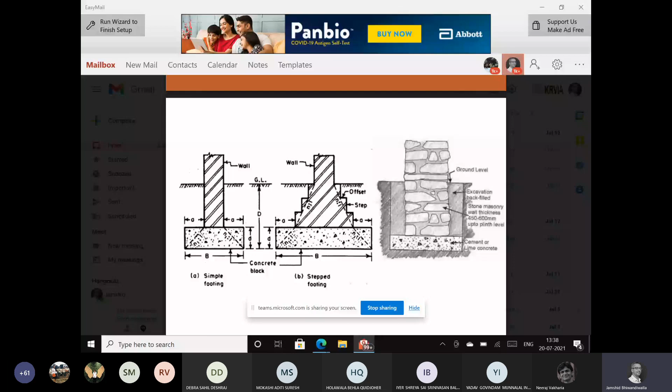Now, today's request is also part of the work that we are to do. If you look at the fifth semester syllabus, it largely talks about shallow basements. And our project too would have in some sense basements to help the building work well. So it makes sense that we discuss all aspects of foundation today, how one goes about it. And we'll also do a recap.

Last time, I think Shravan had very rightly pointed out that a good mix between PowerPoints and sketching classes will help. We had made this kind of presentation last semester for all kinds of foundation systems, and let's hope that can help today. So first of all, we'll look at the very basics of load bearing foundation.

Last year, and even this time, I have a couple of students in my group who are talking about composite construction. Composite construction means that I could have certain columns, a trabeated system, that is column beam structure, and I can also have a good play of load bearing structural system, meaning load bearing walls, either brick or stone walls, in line with the trabeated system. Some of them can be freestanding walls, just to create some kind of impressions.

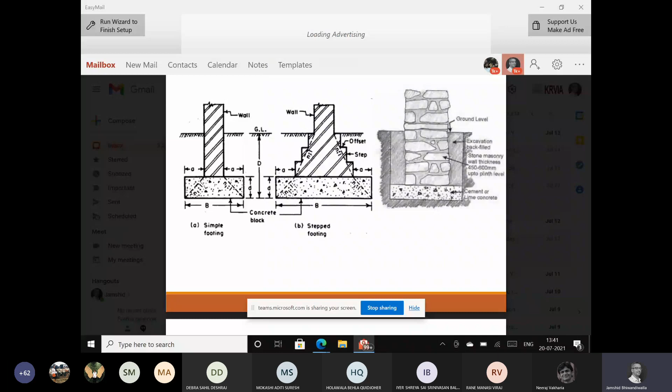I'm sure in the first year this must have been covered, that the width of the load bearing foundation is usually twice the width of the wall above, as well as 150 on either side, that comprises the concrete pad. So usually the lower breadth of a stepped footing is twice the thickness of the wall plus 300.

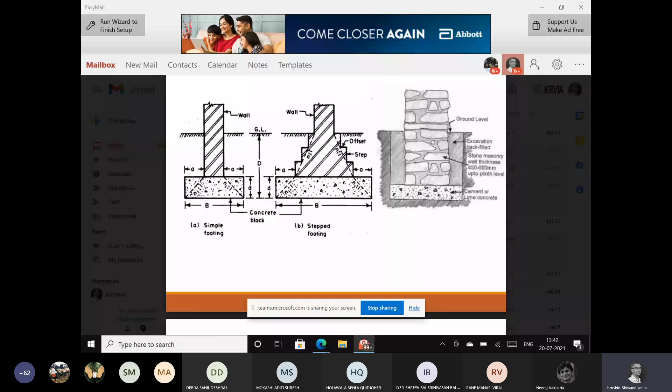So brick walls have the opportunity to step down. But this diagram that you see is not right. Usually the stepping is not so close by, because the foundation goes really low below. It is not as close as the way it is shown here. So this isn't a right diagram in that sense.

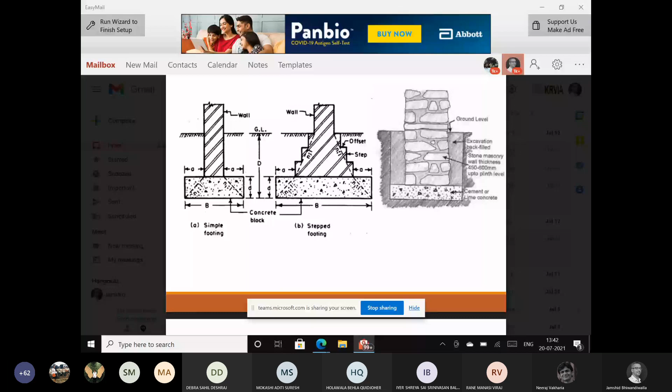In some sense, this is the right diagram where the offsets are large. The offsets are not close by. Every layer is not an offset. The offsets are in some sense large as they go below the ground. And they go as much as 2 meters, 2.5 meters below the ground.

When we do material specification, we will understand that excavating below the ground for normal foundations vis-a-vis excavating below the ground for basements or for deep foundations matters a lot. The more you go below the ground, the more are the problems, the more is the expense, the more is the material use, and all those aspects. That's why most of the time we tend to go a little below the ground.

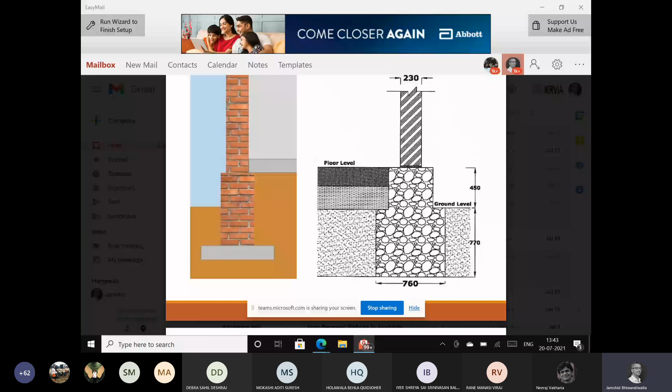There are numerous projects where you actually see that the building has got part below the ground. It's not a full basement. It's a part basement below the ground and part above the ground. It helps a lot in material consumption. It helps a lot in the kind of digging that goes in, the efforts that go. A lot of effort is conserved in doing all of that.

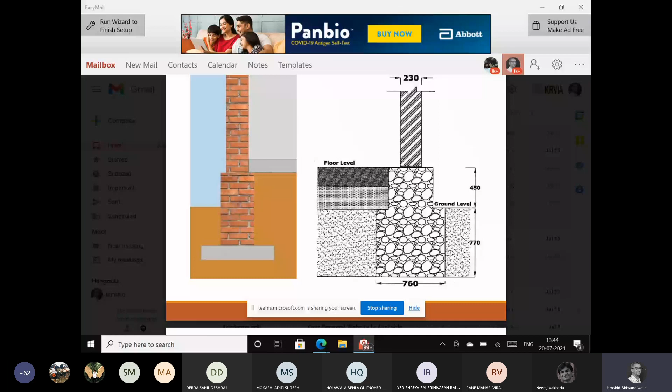So here to the right is a diagram which in some sense is right and in some sense is not right. That's why when we rely on internet based images, it's not necessary that they are right. So to the left, you are seeing a brick foundation whereby the brickwork becomes double and the pad is 300 more than the brickwork. So 2T plus 300.

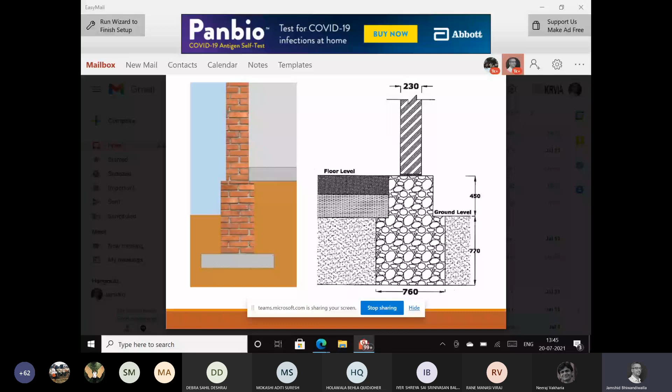Whereas what you see to the right shows that the stone foundation wall does not stagger. Usually it is very difficult to make this stagger when you're dealing with stone. The other truth is that most of the time, at least in Maharashtra, we avoid using any brick below the ground. So if you make a load bearing bungalow, a load bearing institute, or even a compound wall, you may have brickwork above the ground, but below the ground, usually you have basalt stone, which is so easily available and so rough and easy to work with.

Easy to work with does not mean that it is easy to cut. What I'm saying is it is easily available. And when I do not have to do very coursed rubble masonry or things that you have learned in the first year, it becomes very easy to just dig a thick strip of the width of 2T plus 300 and dump the rubble below. So what you see to the right in this diagram is what is right.

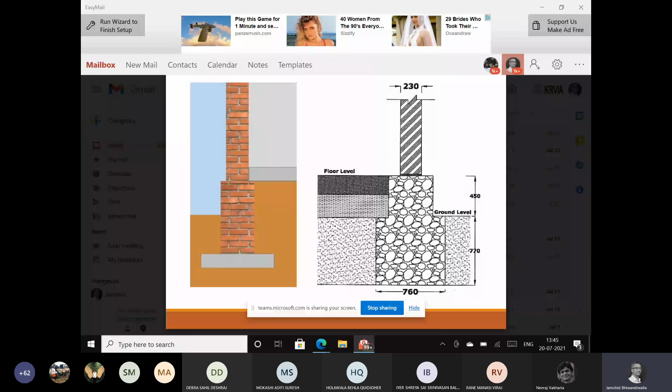Usually the width of the stone wall below the ground remains constant, whereas the brick wall is usually stepped. So brick walls below the foundation are usually stepped. Stone walls below the foundation are usually constant. And you don't need to actually go below the ground and start building stone walls.

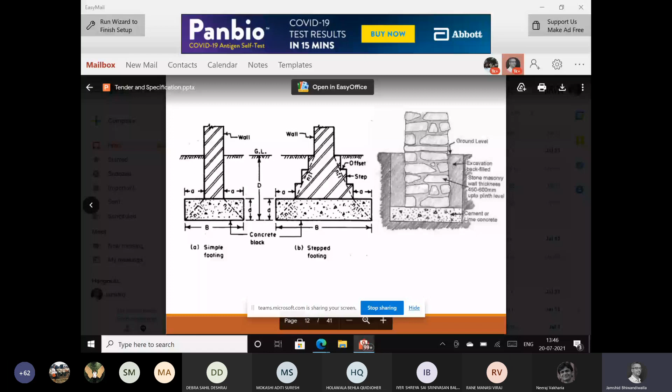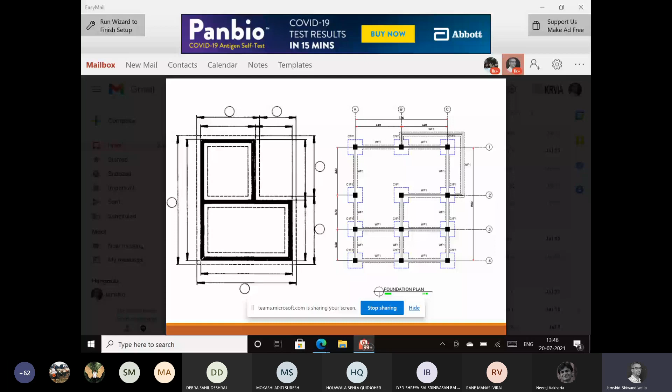So this is the difference you will see between a load bearing foundation vis-a-vis a trabeated foundation, and that's the big saving. Why do people not go about building large load bearing constructions? Because the material that is going to go below the ground in load bearing is immense, because everything that is above the ground is also going to go below the ground.

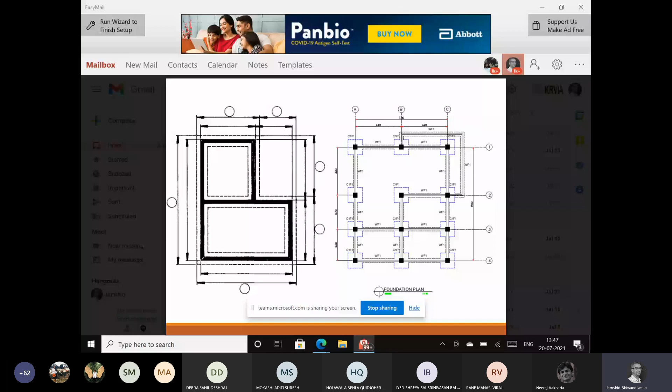Everything that goes below the ground is also to go, everything that is above the ground is also to go below the ground. So in that sense, the kind of material that is going to go in a load bearing foundation is much, much larger. And that's why in today's day and time, when you work with material economics, it makes sense to go in for systems whereby there can be a larger saving of material.

Similarly, in a trabeated structure like the one you see to the right, it is only those columns that are going below and are getting connected by plinth beams, and what the load is getting transferred through is called an isolated footing. So load bearing foundations are called strip foundations because they are laid in entire strips, whereas trabeated or framed structures have what are called isolated footings.

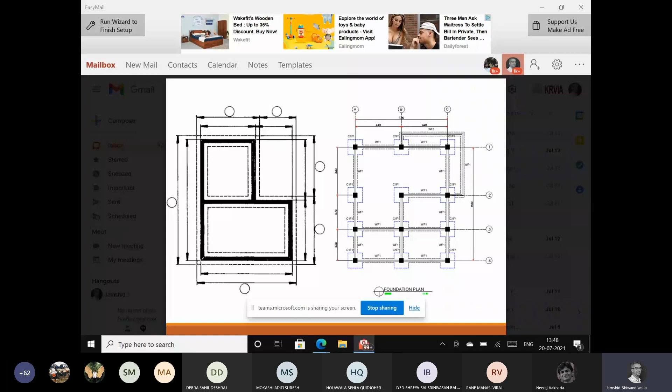So what you're seeing to the left is the hatch of the entire wall. When you make foundation drawings for your working drawings, this is the major difference in representation that you're going to see. If you have load bearing walls, your entire walls will be shown hatched. They'll go below the ground. I'm sure in your last year's IDS, some of you must have dealt with either load bearing or frame structures, and accordingly made a foundation drawing.

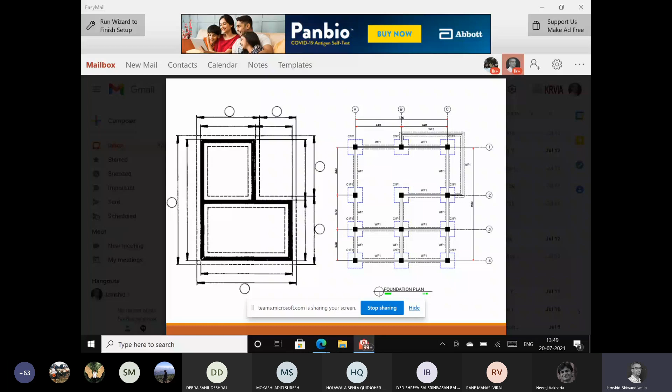Similarly, in framed construction, all you will see is the hatch of the column, the footing around it, and you will see that columns are further connected using plinth beams. Now, trabeated or framed construction has that big advantage that the foundations are further connected using plinth beams, something that is happening in load bearing construction. In load bearing construction or strip foundation, it is all interconnected below the ground too.

In frame structures also, plinth beams are connecting all the footings below the ground, thereby not allowing the footings to separate off in case there are floods or earthquakes. So below the ground, there is a tie between all the foundations, and that is very important. And that is what plinth beams end up doing.

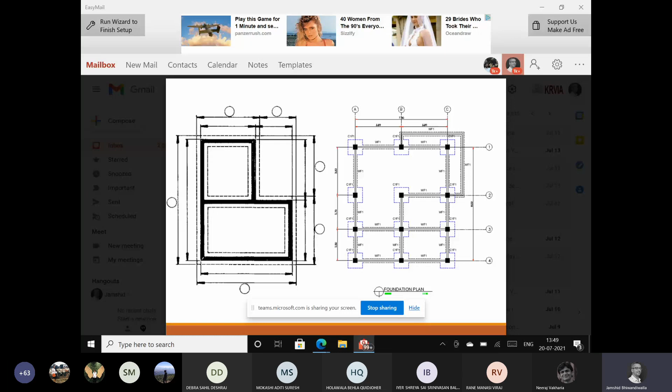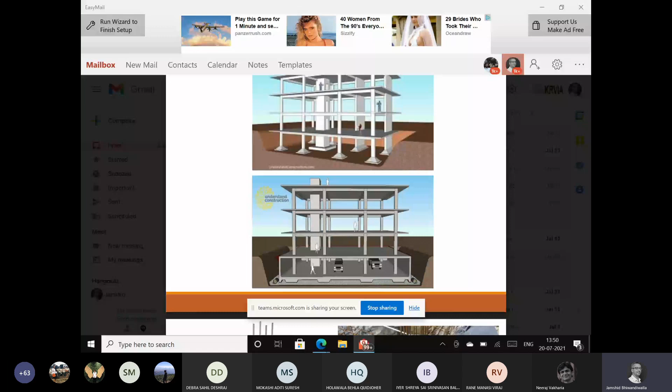Now, what's the difference between an isolated footing framed structure and a frame structure that goes down and becomes what is called a basement? What you can see here is that columns go down and give you isolated footings, and that is all you need to dig around. You don't need to dig the entire length of the wall. You just need to dig a little more than the width of the column that goes down to become a footing.

Whereas when I'm dealing with a basement, I actually need to dig the entire width of the building, or as much as I want as the basement. And it is literally a kind of container or box that is made and tucked into the ground, whereby the bottom is all well connected. That means all your columns are well connected at the bottom by an element that is now not called a footing but a raft. So we have a raft.

If you imagine, a raft is something that floats over water. We create rafts to float in water. Similarly, this raft is also allowing your building to float, only it is floating above soil. In construction systems, soil is considered as good as a fluid, and your building is as good as a float over the ground. So the raft is allowing all the columns to get connected by creating a plane below the ground, as you see here.

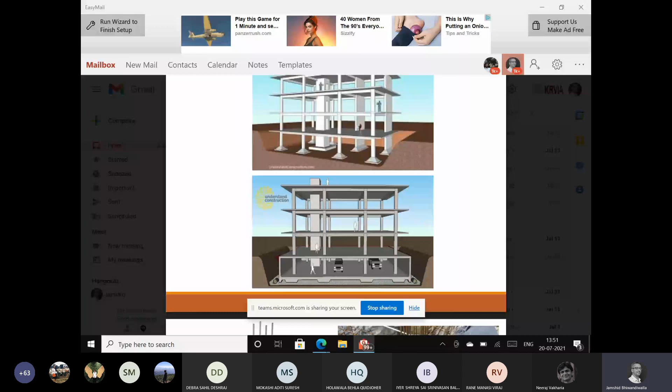Where the columns come, in some areas the cross section of the raft is a little larger, if you see visually. In some areas the raft is thin. Most of the time the raft is of the same thickness. There can be staggers and undulations in the raft in order to conserve material, but it could also be constantly laid all throughout.

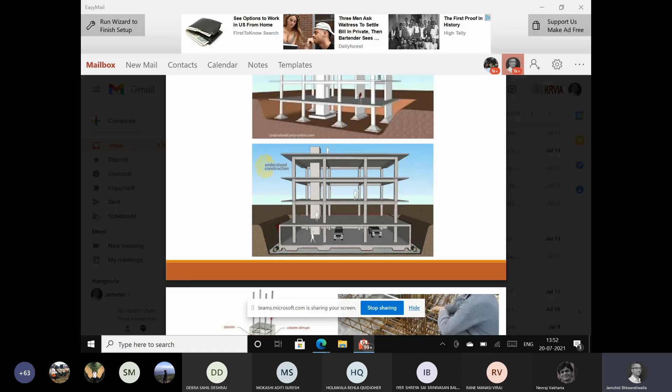So the raft is one element, and the vertical walls that go to the sides of the raft are called retaining walls. Those are usually done in RCC in order to finish off the entire box that gets tucked below the ground. So now you have a system that comprises an entire slab laid below the ground called a raft, vertical RCC walls called retaining walls, and a slab on the top to finish off and create a new ground level.

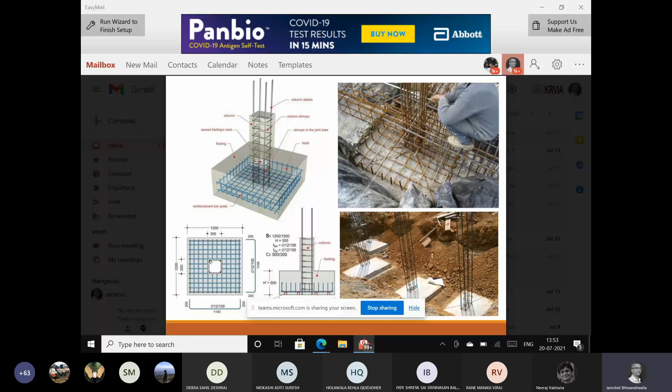So now that's the difference, and that's how your building is going to be looking. So now let us look at some of the differences between very simple foundation details as compared to rafts and things like that.

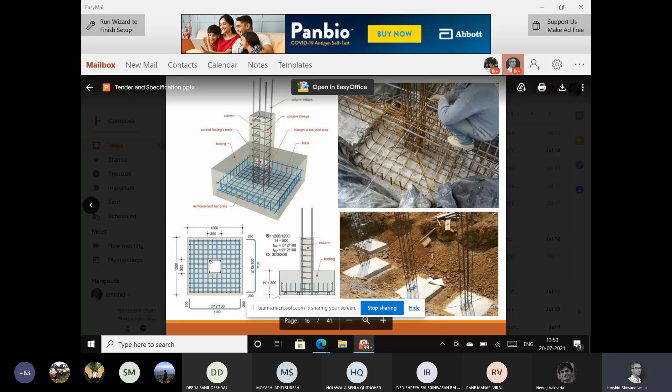So an isolated footing has reinforcement only at the bottom. RCC footing has reinforcement laid only at the bottom with a bent bar on top. So it's an entire mesh that is laid only at the bottom of the slab. Do not forget, this mesh is only there to spread the load, equidistantly spread the load over the soil. You can see all the three images.

You can see what is done in 3D and drawn in section corresponds to how the footing bars are laid in reality, and how the column bars get entangled. The column bars that come all the way from the top of the building, how they come and get entangled into this mesh that is laid below. It just bends and lays below.

So if you look at the 3D, the drawing 3D is not entirely correct, because it does not show how the columns come and get entangled into the mesh below. Whereas the photograph to the top right actually shows how the column steel comes down and bends to get entangled with the mesh of the footing.

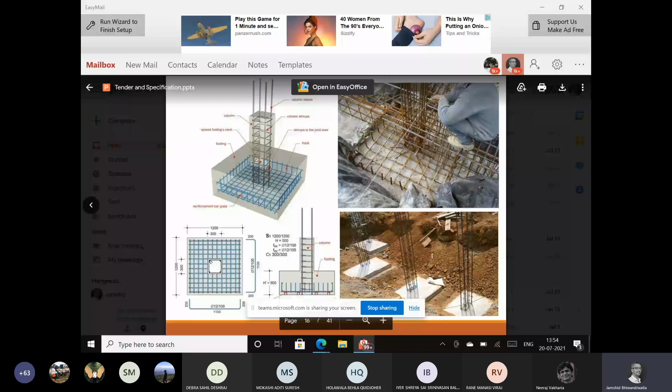Should you have any doubts, please feel free to interrupt. There is nothing wrong in interrupting if something is not clear, rather than asking doubts at the end. If the doubt is small and can help, I may miss out on something, so if ever there is a doubt, you can always inquire in between.

Now the footing is cast. There are various types of footings that are cast. A footing can be cast as an entire rectangle, but it is found that trapezoidal footings are more material effective, cost effective. And so the image to the right bottom shows trapezoidal footings with limited thickness. The thickness along the edges is less. The thickness along the footing is large, and it usually slopes down.

So that's the difference. In the diagram to the left, the concrete is shown to be a rectangular cuboid with no slopes. But you can save on the material of the footing by sloping it into a trapezoidal footing. And these are what are called plinth beams. They help connect the footing at various levels.

Plinth beams are also further of two types. Plinth beams that are on the periphery, which we usually call external, are usually lower, thereby helping you to do brickwork on top of them. Internal plinth beams are usually higher. So internal plinth beams are higher and external plinth beams are a little lower in order to help pass services, do brickwork and stuff like that.

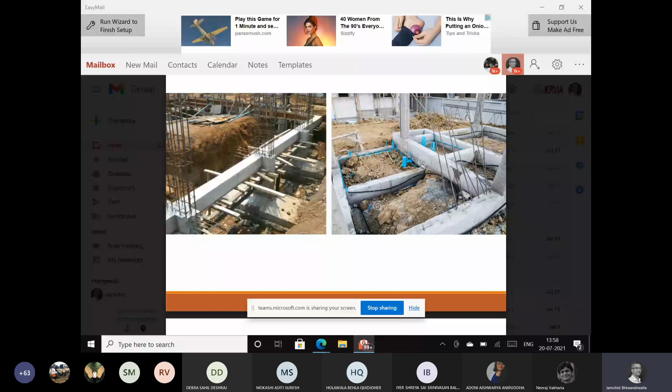As and when your case works out, you'll further know how it works. We should be in a position to explain, or in a separate sketch I'll explain, how an internal plinth beam is different from that of an external plinth beam.

Now, footings, isolated footings are not only related to RCC, they are most common for RCC, but there is also an isolated footing in steel, which is well known as grillage foundation. So grillage foundations are nothing but isolated footings made entirely in mild steel. And what does that mean?

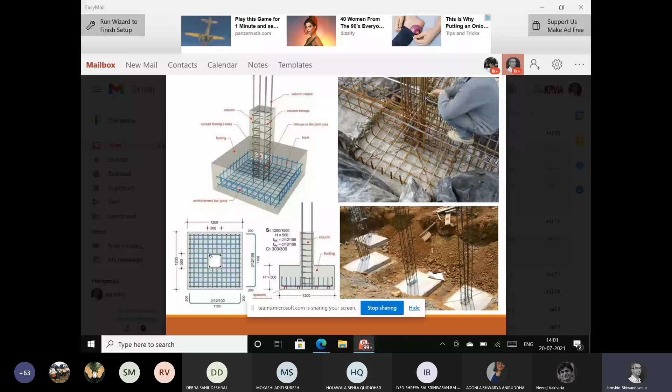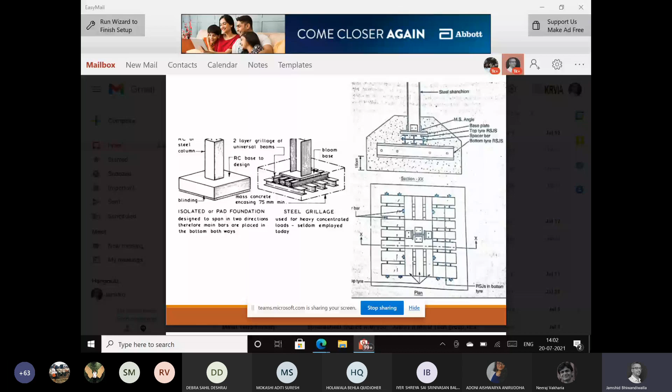So where is grillage foundation used? Grillage foundations are largely used for temporary structures, like a circus tent. In a circus tent, the mast at the center is usually very high. It comprises a central column. Now, if that needs a foundation below, it will have this kind of foundation, a foundation that can be dismantled.

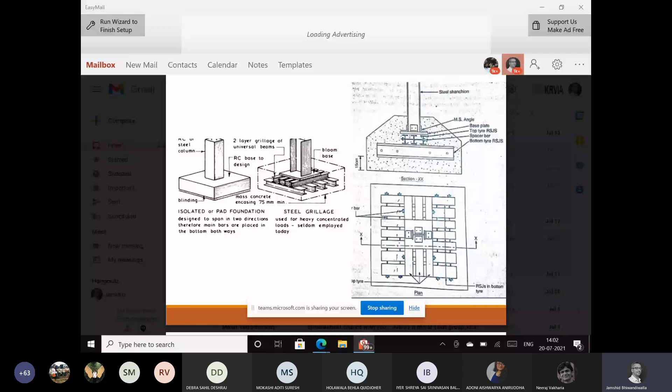So if you're doing a circus tent in a public ground, naturally you don't expect to make foundations and leave them and go. So you dig a pit, put in this kind of grillage foundation, put your supports, be there for a month, a few weeks, whatever it is. And when you wind up, you bring down the tent. You can open up, nut bolt even your foundation, put it in your truck and take it with you to your next site.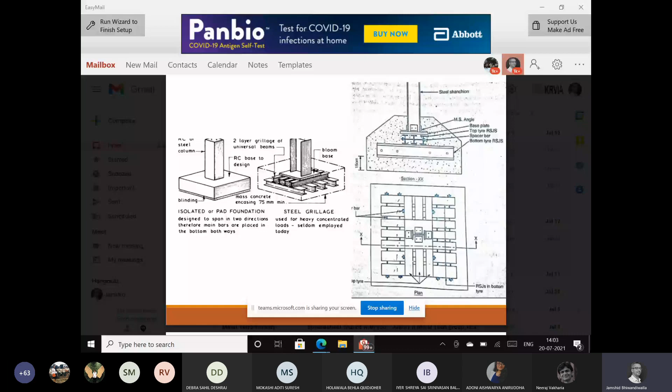So for transitional or temporary foundations, grillage foundations work the best. Otherwise, they prove to be pretty expensive by way of the amount of material used. Plus, it is not advisable to use steel structures below the ground, because it tends to deteriorate.

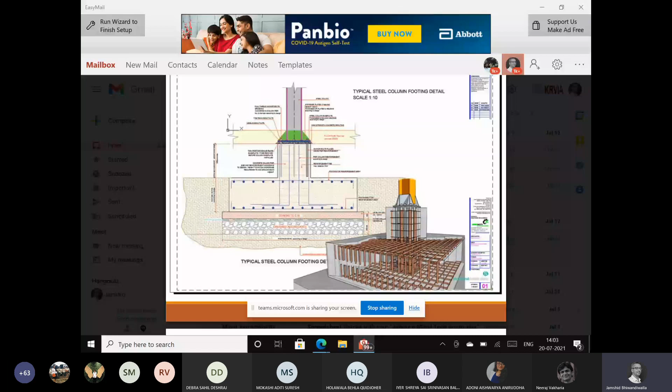So you could also have a composite system. When someone asks, when we have steel columns, what kind of foundation do we have for a steel column structure? You could have a composite system for a steel structure. Your columns could be in steel, and your footing below could actually be in concrete. So you could have a stub column that could come in concrete.

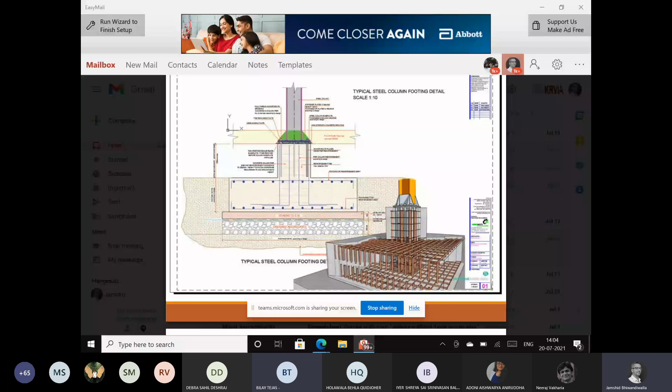Someone have a doubt? Yeah. Yes. In the last slide in the grillage foundation, in the section it says there is a spacer bar. So then, is there a distance between the two flanges of the I-beams there? And if it is there, then what is the minimum distance?

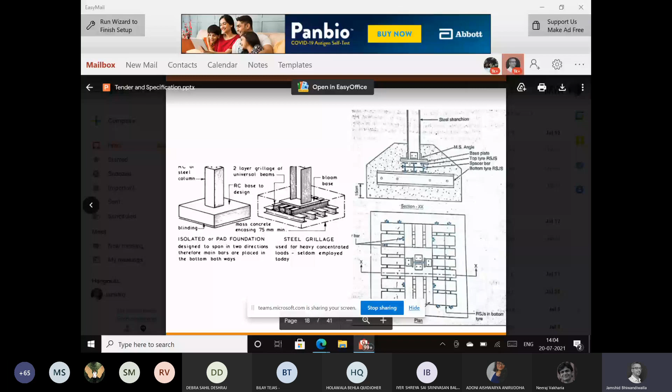What happens is that the closer we keep the I-sections, the more the number of I-sections that are going to go in. So it's not necessary that you place the I-sections so close by that there is no space in them. The I-sections can easily afford to be spaced out, as you see in both the plan below and the 3D. So the I-sections are spaced out depending upon the width of the footing and depending upon the length of the footing.

And how many I-sections should you be having? What should be the depth of the I-sections? Those will be given by the structural engineer, right? Depending upon the load that comes on the column. Now, when I arrange these columns, I do not want them to be arranged in a particular way. I want them to be arranged in a

Jimmy, we can't hear you. Are you speaking? Yeah, I guess his internet is fluctuating. Let me just check. Jimmy, you are on mute, I guess. Yeah, can you hear me? Yeah, now. I think I got disconnected. Can you hear me? Can you see the screen also?

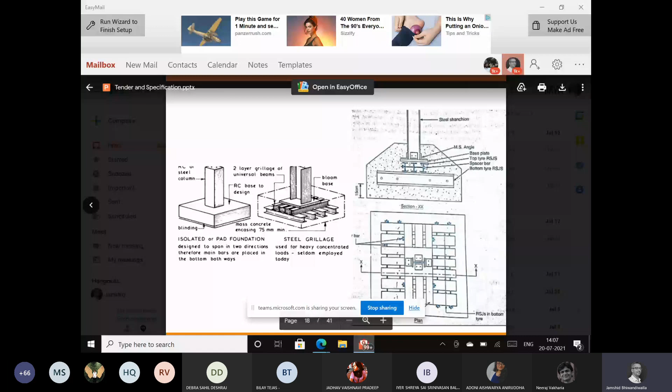Yes. So the idea is that since the I-sections are placed a little apart, both at the first layer as well as at the second level, while you are working you do not want the I-sections to move, thereby causing a disturbance in the load transfer as well as the center of gravity. At such a point of time, you have spacer bars, or you have drilled holes through and through your I-sections, such that they can be held in position and they do not move. So those are the spacer bars they are talking about, to hold the I-sections in position. Am I clear? Yeah. So we'll go ahead.

Something that can replace the grillage foundation below the ground is what is called an RCC footing with a stub column. What are stub columns? Stub columns are those that come up only up to the ground level. They do not go beyond that. You will have stub columns for numerous other plinth level details, like steps or an extended plinth. All of that load needs to go below the ground, and you can't make surfaces without proper load transfer. In such a case, you need stub columns.

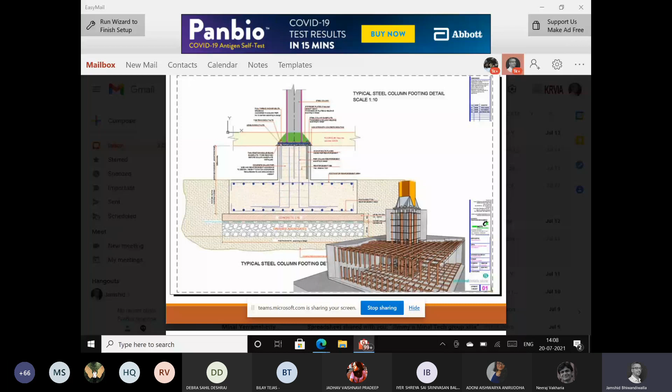So the stub column allows the steel column to get fitted at the ground level without allowing your steel columns to go below the ground. That's the kind of opportunity you get in case you are designing in steel and you don't want the column to go below the ground, and you want an RCC foundation, because RCC foundations are very cost effective, as they have minimal steel in them. And they weather all other aspects of foundation below the ground. So in that sense, it works well.

Now, what you're seeing here is called combined footings or combined foundations. I do not know if these have been covered earlier, but when two foundations come very close by, it makes sense that you combine them, because two foundations that are too close by and literally touch each other can cause problems in the near future, since there is always some movement in the building. So when footings are close to each other, they might as well be merged, especially when the columns are really close by.

You should preferably avoid having columns close by, but in case they come close by, you can afford to merge them by something called combined footings. In combined footings, the footing is made up of literally like a beam in between. That means the entire depth of the footing acts like a beam between the two columns, thereby giving stiffness to the column.

You will have a mesh of bars at the bottom of the footing, like earlier, but now you will also have a mesh of bars along the top of the footing. So in order to create literally like a beam, I will have bars both along the top of the footing as well as at the bottom of the footing. And as you see, the column bars are going and getting entangled at the bottom of the footing.

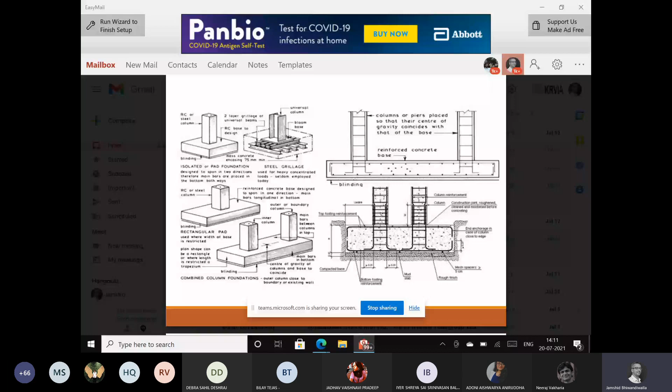Now these are what are called cantilever footings or eccentric footings. What are eccentric footings and what are cantilever footings? These are kinds of footings that usually come at the end of your plot. You may have a ramp at the end of your plot. You have a building that touches you. I'm sure you've seen in cities and towns buildings that are touching one another. They are called row houses. My building touches your building at one particular end.

That means along the two sides of the row houses you cannot afford to have windows, because there is a wall of your adjoining neighbor, whereas you can afford to have windows along the shorter or longer span. So you can afford to have windows on two sides. And that's what makes a row house different from a bungalow. A bungalow, in that sense, has windows on all four sides. A row house will share its wall with its neighbor.

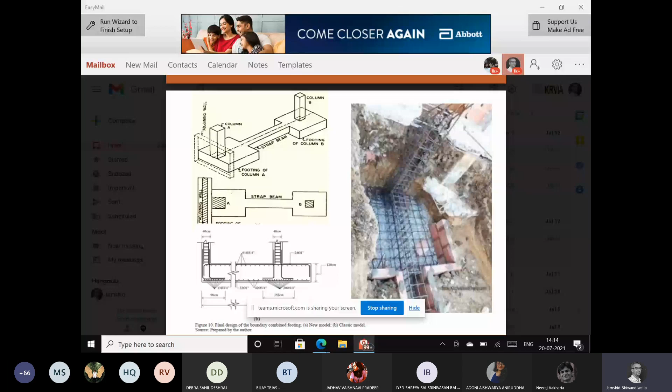And the depth of the strap beam is equivalent to the entire width of the footing, whereby you have bars again laid both at the top and the bottom. As we all know, beams comprise two bars along the top and minimum two bars at the bottom with the help of stirrups. And so if I'm calling this a strap beam, then I might as well have bars both at the top of the beam and at the bottom of the beam, thereby connecting the eccentric footing to the normal footing with the help of the strap beam.

To the right is a diagram that shows how this would work particularly. It comprises the column, the eccentric foundation, and naturally the strap beam. Should you have any doubt, feel free to ask before we go ahead.

Look at the bottom left, look at how the bars of the column are entangled in the eccentric footing. The bars are bent, brought down. All column bars are brought down, bent and entangled in the lower mesh of the footing. So the lower mesh of the footing always has the bars of the column that have come down and bent in order to create all kinds of stability.

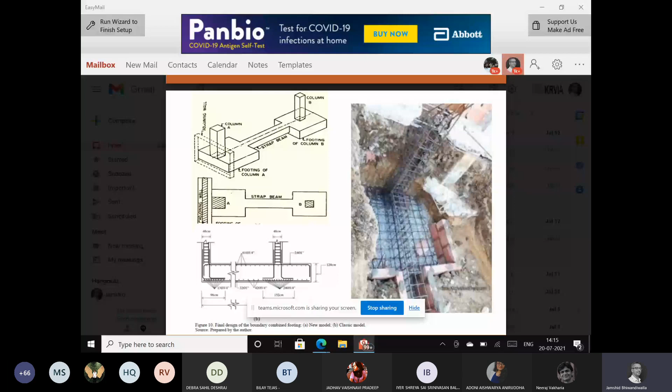Should there be no problems, we'll go further to basements. In continuation, in line with this idea, now for a basement, all my columns are connected with what is called a raft. And you see a raft laid below. A raft comprises a slab with bars both along the top as well as along the bottom, and the column bars come down and entangle themselves into these bars in order to spread the load evenly.

So most of the time the depth of your isolated footing can be larger than that of a raft, because don't forget, your entire load of the column is being spread by a limited area which is called an isolated footing. In the case of a raft, your entire load of the column is spread by the entire raft. It is equally distributed along the entire raft.

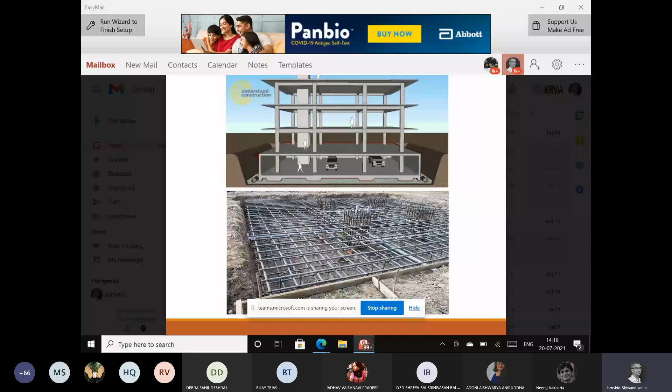In some sense, the depth of the raft is usually less than the depth of an isolated footing. But don't forget, the extent of your isolated footing is very limited. The extent of your raft is large, thereby able to spread the load over the subsoil over a larger extent. And that's why the depth of the raft can afford to be low.

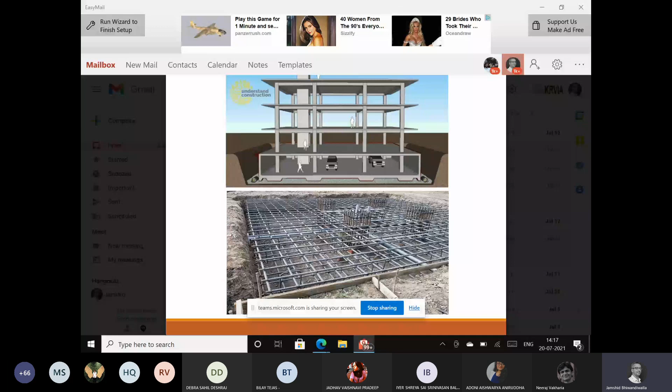So look at the kind of bars that make up a raft. There are bars both along the top and the bottom. The bars along the bottom are actually to take the load of the column, or the load transfer that's coming via the structure down, whereas the bars along the top help the raft to take the upward thrust of the soil. So I have bars both along the top as well as along the bottom to take either force. Don't forget, the soil below the raft is also giving an upthrust.

And so you'd want to have bars both along the top as well as at the bottom with stirrups such that these bars don't go haywire. In that sense, it takes care of the upward thrust as well as the downward thrust. And the column bars are entangled as they were entangled in isolated footings. And you see that it becomes quite a mesh at the raft level.

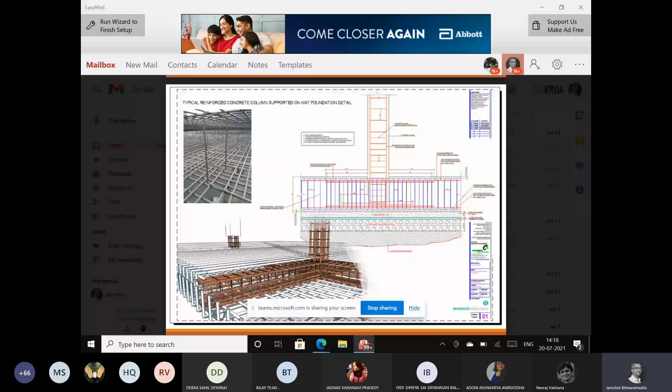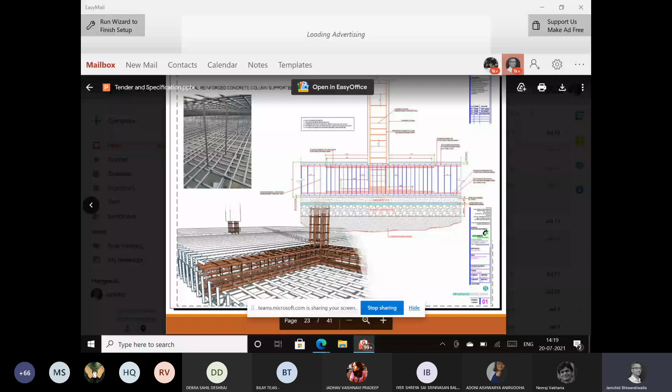And there is something called chairs that are laid between the bars, so that the bars of the top and the bars of the bottom do not collapse over each other while I'm laying concrete. If you look at the photograph to the top left, what you see, bent vertical bars, are called chairs.

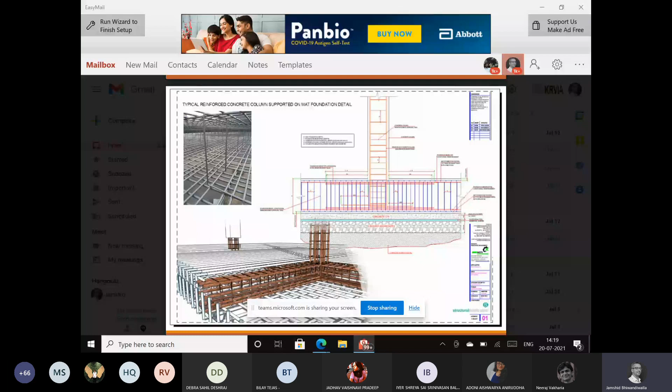These allow the top bars to be held in position, because the entire mesh of the top bars has immense load. There is a good possibility that this mesh comes down as I'm pouring concrete. In order to hold the upper mesh in position, to maintain the distance or the depth given by the structural engineer, I have chairs that hold my top bars relative to my bottom bars and allow my concrete to fill in between.

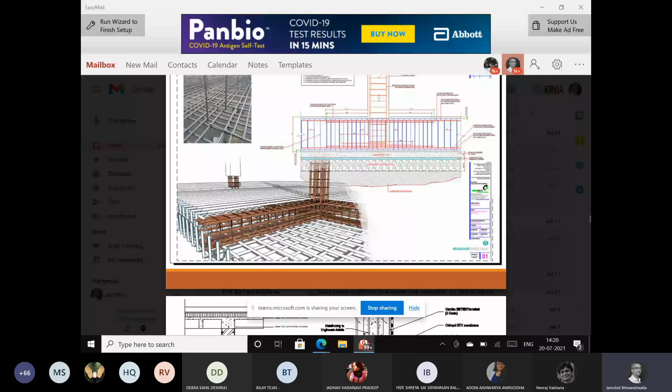I think this is the last of the slides before we go ahead. So a raft comprises what is called a toe. The end of the raft usually comes to what is called a toe that helps in the waterproofing of the raft in some sense. So if you look at this detail, and I'll be sketching out some things after this part.

What you see projecting out beyond the raft is called a toe, and that allows the retaining wall to spring up, thereby, as in the question I had earlier, the retaining wall and the raft are both homogeneous in some sense. The photograph to the right shows that before the raft is cast in concrete, there are vertical bars left out of the raft, allowing the retaining wall to be cast in conjunction with the raft below. You can also see lightly, in the photograph to the right below, the chairs that are laid.

If you pay attention, there are all these vertical members that you see in the raft that are holding the bars both along the top as well as along the bottom. Further to the top right, what you see on the outside is called box waterproofing, and I will come to that a little later when I start sketching and explain to you how this entire thing works out.

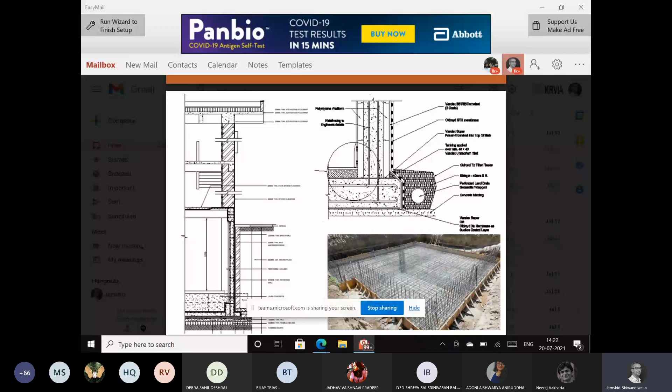So is there any doubt till now, or have you understood to whatever extent I have been able to talk, especially with regards to the raft? Now, with regards to the retaining wall and the slab, and as someone asked, how plinth beams work and how things work, I'm going to sketch those out such that it helps everyone understand better. Till now, are things clear? Should you have any doubt, please ask. So by the time I go to the whiteboard, are there any doubts?

So when we're talking about water logging issues, does the foundation have to change its form, or is it just the basement retaining wall? If my site is prone to getting wet a lot because it's near the coast and heavy rainfall in Mumbai... No, I didn't get your query, Shravan. When we talk about water logging in a site, because my site is near the coast and there is heavy rainfall in Mumbai, will the basement retaining wall change its form, or will the basement stay the same? No. Basements remain.

See, you have to understand, basements are always provided with anti-flooding kind of things planned in them. They are called a sump. So first of all, you need to understand, when you build along the coast, the upthrust of the water or the soil into your raft is much, much larger. So your raft thickness increases. In a normal dry condition, perhaps your basement rafts are maybe 400 mm, 600 mm. They can be as small as 300 mm also.

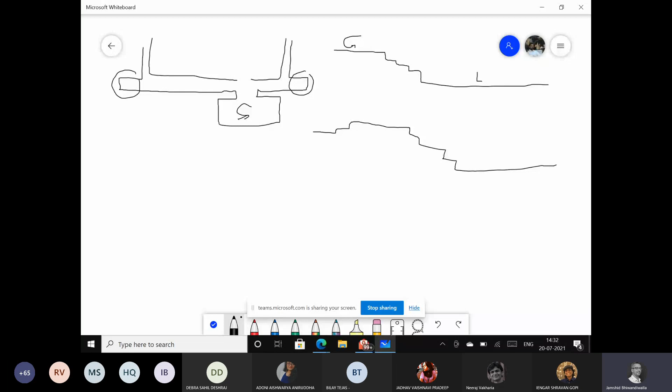The other way to plan is that I first create a couple of steps up, come to the upper level, and then start stepping down. So these are various ways to ensure that water does not come to your lower levels, because your waters would actually be restricted to these layers only. So you should always step up before you go down.

Similarly, in car park ramps also, you will find that ramps actually go up before they enter the basement, and then they come down into the basement. Should your building be here, ramps usually do not start directly. So if your road level is here, ramps go up, and then they slope down below the ground level. So this is with regards to avoiding water from going into basements.

I hope I've clarified your doubts, Shravan. Yes, thank you so much.

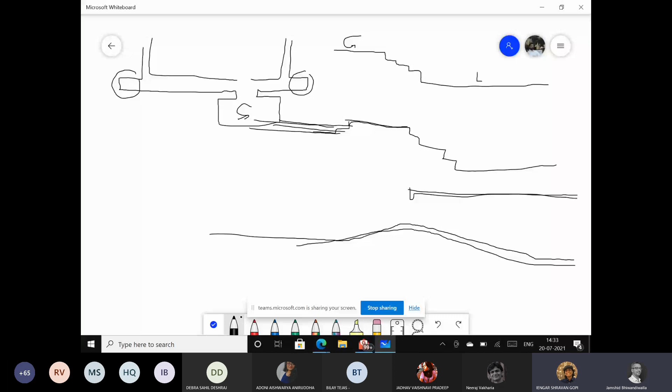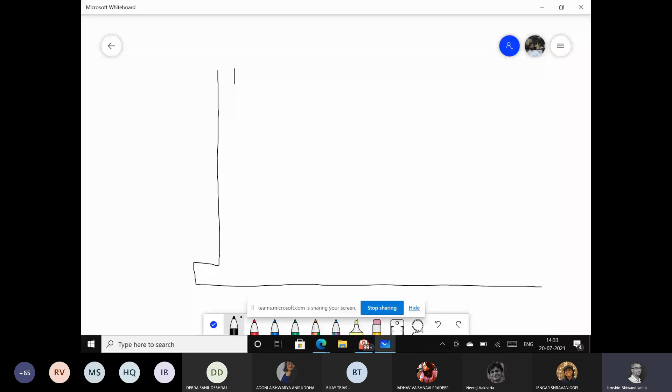Now, from where we stopped in the lecture, considering this is a construction class, we'll get into some finer details of the basement design. First we'll look at the cross section of both the raft and the retaining wall, and as someone asked, how does it work at the ground level? So if I have to draw, as I explained earlier, your raft has a set of bars first at the bottom that usually come right up to the toe and bend upwards. And similarly, I have bars that are at the top.

So there are two sets of bars in both directions. That means it's a mesh. So naturally, also bars in the other direction. So that's what I'm talking about: bars in both directions, mesh.

And I talked about something called chairs. What do those mean? Those are metal members that are put to keep the top bars from sitting down over the lower bars. These are chairs. They'll be everywhere, spaced out, in order to make sure that the upper mesh does not come down onto my lower bars, because I'm going to pour concrete. This entire thing is filled with concrete, right? I'm going to pour concrete.

Now usually the bottom of the raft is well waterproofed. So first of all, at the bottom of the raft you can have a layer of PCC laid in order to make a true level onto which you can cast the raft.

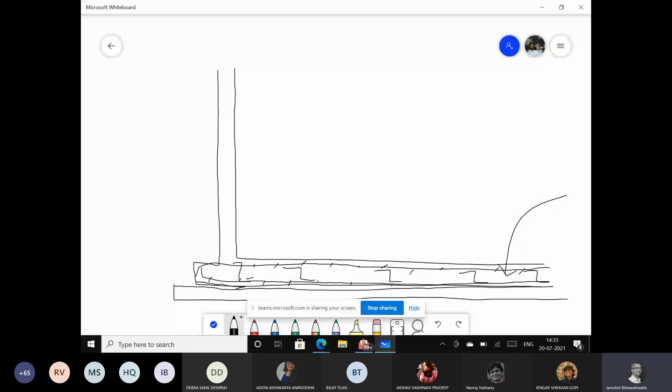But most important of all, at this lower level it becomes necessary that you don't undulate the lower surface, because you want to create an impermeable layer which is called waterproofing, membrane waterproofing, such that my raft does not leak from the bottom. So there is waterproofing done at the bottom. I apologize for the kind of lines that are coming, but you need to understand that there is a layer of waterproofing, as good as an 8 to 10 layer of membrane waterproofing,

that is there between the PCC layer and the raft that is laid. Rafts can vary; if it's a small raft, they can vary from 300 to 600 to anything. It all depends upon the kind of upthrust and the kind of spans between the columns. Like in your auditorium, your columns are going to be on either end, which means that raft will have to be really thick. So to be safe, you should consider anywhere between 450 to 750 as depths of the raft.

Now, you need to understand that the raft and the retaining wall are both homogeneous in some manner. So the bars of the retaining wall are left in place, like I showed you in the last image. If you look at these bars along the periphery of the raft, these are bars left in place before I start concreting my raft below. And these bars help add further bars for the retaining wall. So the retaining wall also has bars along both the outer and the inner periphery of the retaining wall.

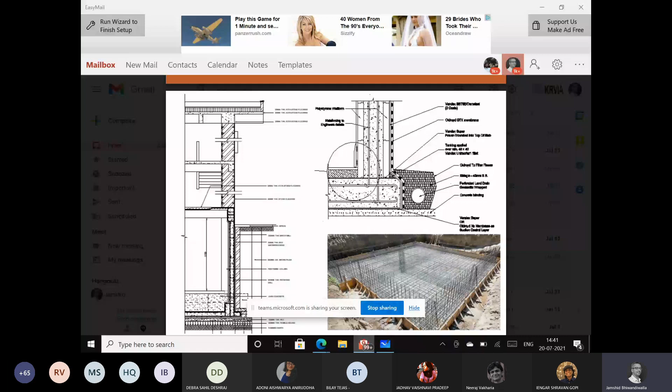So what you will see, I do not know if you see here, if you see in detail in the cross section to the left, you will find such rebates that are created in the concrete retaining wall, and they are largely done in place in order to make sure that you have the right kind of rebate. You create the joint between the old concrete and the new concrete, and you make sure that your water does not seep in. So this is the kind of detailing that is usually done for a retaining wall.

Not to forget that there are steel bars along the outer edge and along the inner edge of the retaining wall. Now this toe that you see of the raft helps me to do all kinds of box waterproofing from the outside. It creates some kind of a platform all around in order for me to stand there and do a waterproofing layer coat. So the waterproofing layer coat is put outside along the wall.

Then sometimes there is a layer of tiles that is laid in staggered joint. Sometimes there is brickwork also done, in order to do what is called box waterproofing of the outside retaining wall. So the toe in that sense helps me to build all these things all around the retaining wall, and all these layers help me to avoid subsoil water from coming into the basement.

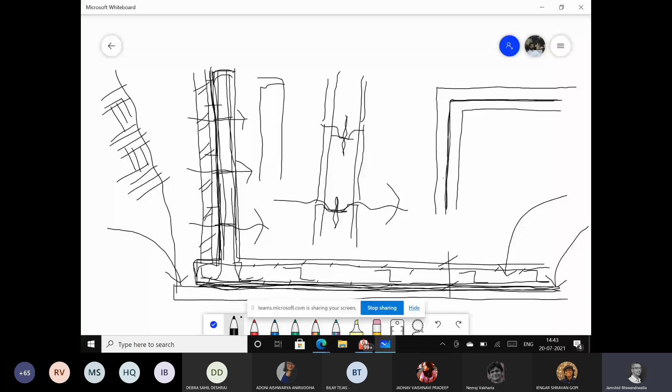So if this is your retaining wall, what I'm seeing beyond the retaining wall, this is nothing but the toe of the raft that is projecting out, and this can further help me to either do tiling outside or brickwork outside, depending upon what kind of detailing is required for box waterproofing. Is it clear till now? Are there any doubts in the idea of casting a raft vis-a-vis a retaining wall?

It is all homogeneous. Though I do not cast the entire raft and retaining wall in one go, I can easily say at least the first part of the retaining wall is cast along with the raft. Don't forget, if I try to concrete vertical cross sections of a wall all together, it does not work, because all the concrete will settle down. The concrete has a high density, so it will start bulging out the formwork. So I cannot concrete the entire retaining wall in one go. I have to do it in parts and pieces.

So if I try to concrete the entire retaining wall in one go, what will happen is all my aggregate may settle down, or the entire concrete may go down and bulge the formwork, because it has got a high density. So bottom line, I am able to cast retaining walls in parts and pieces.

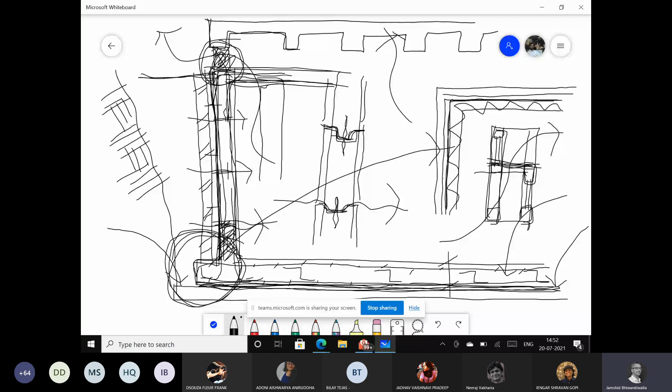The other aspect to it is that not everywhere there is a strip window. Suppose there is a column here in your retaining wall, which is part of the retaining wall. Are you understanding what I'm saying? In some sense I'm saying that the column goes and then the retaining wall goes like that. Column comes here again, retaining wall, column, things like that.

At such points where the columns are, you may not have a strip window there. So there may be a window only in the center. There may not be a window here, there may again be a window here. So in between bays, there may be windows. What I'm trying to say is, the slab actually comes and connects it. If there is a column, the slab will get connected to the column, and the slab can afford to have a gap between the retaining wall and the slab such that I can have appropriate ventilation. You got it? Thank you.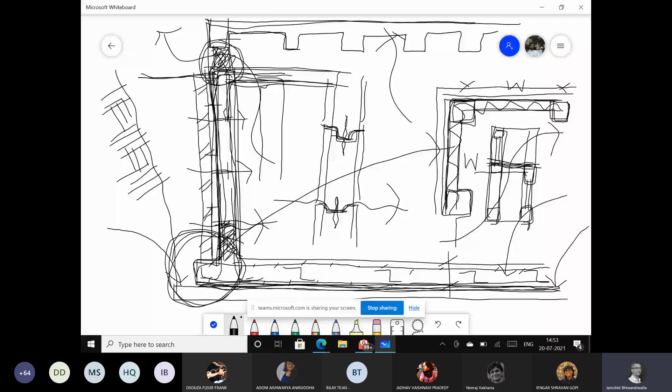If we are done with the query on these advanced slab systems, now I'll go to a new whiteboard. I've saved that whiteboard in case you need it, but I'm sure there are better sketches available. I only needed to sketch in order to explain the detailing of various bars that is expected. So now we'll go into other aspects of the basement planning.

The first aspect of the basement planning is that it makes much more sense if your structural system and your retaining wall merge together. What does that mean? That means that if I have columns along the periphery of my building, in whatever manner, it makes sense if my column structure and my retaining wall all merge together.

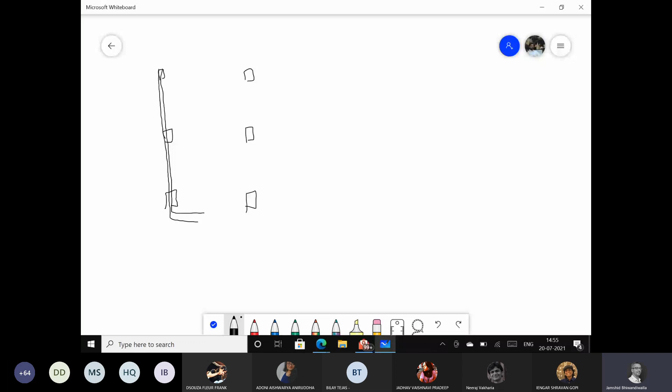That means if in reality my column and my retaining wall look like that, there's nothing wrong in that. Instead, it's good. What I'm trying to say is that if the column structure coming from top and the retaining wall merge together, it's good. Merging an upper column structural system and retaining wall is very much possible because it's all homogeneous. Don't forget, column is in RCC, retaining wall is in RCC. The merging of the two is very simple.

But not all the time this helps. Sometimes I do not want the columns to be there along the periphery. Like, suppose I'm talking about flat slabs. We all know, as per our earlier discussion, that a flat slab comprises one-third of its span as a column strip, which has more steel in it, and so it can cantilever to that extent.

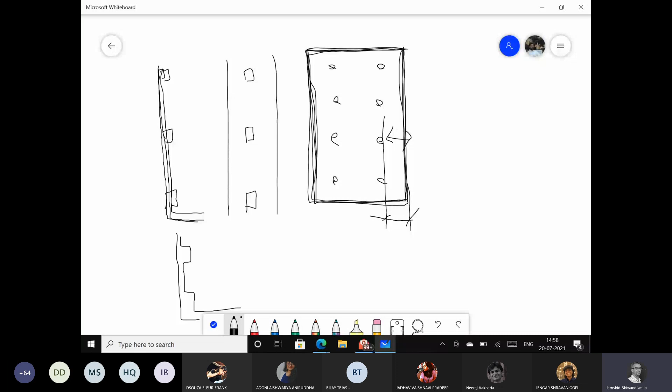If this is my building plot, my building can only afford to be so much. We all know we have to leave side open spaces. We have to leave all these side open spaces, right? For fire truck, for side open, to respect easement. You know what is easement? To respect the light and ventilation of my neighbor, because he may be staying there before me.

So if he's staying there and if I go and build right up to his boundary wall, I may actually be affecting his light and ventilation. So that is something called easement rights. That is something called easement rights. So why would I

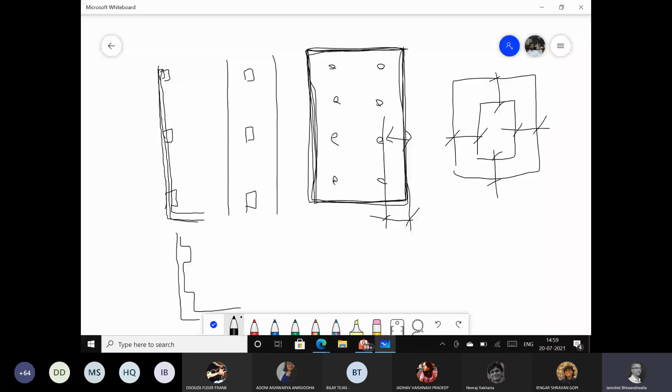There are basements, but the rule for basements is that I can literally, not exactly all throughout, but I can literally build right up to the edge of my plot. The minute I say that I can build right up to the edge of my plot, something like this becomes very important. What is that? That means if my structural system does not go right till the edge of my plot.

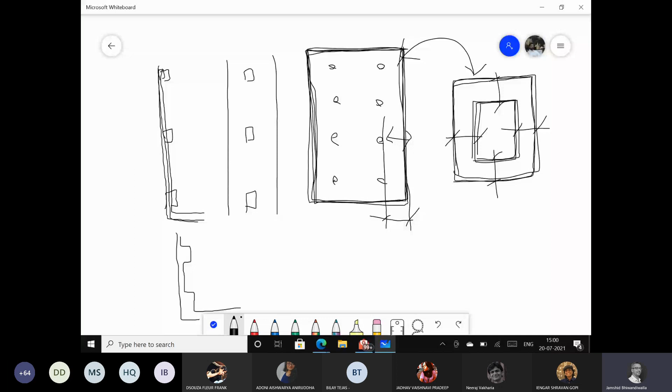What I'm trying to tell you is that in your design there can be two possibilities. One is that your building is as per the columns. You have columns that are there, and your columns and your basement clearly coincide with each other. This may be part, this may be full, depending. You may have part of the building in which the columns coincide with your retaining wall,

or you may have a structure in which the retaining wall has nothing to do with the building, so to say. That means the retaining wall can be completely independent of the structure of the building in some sense, and the two may have nothing to do with each other. Instead, having an independent structural system may help you. I'll give you an example in this diagram that is there.

Suppose your building sits here. And these two are extensions of your basement in some sense. These two can actually help you plan ramps to get into your basement. This can actually help to get into it. So such provisions or extensions that may be there, at the sides of your basement or along it.

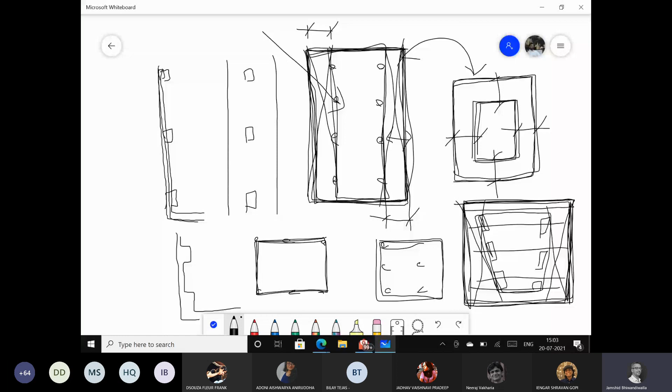So if this is 1/3 of your span, this can project out and your retaining wall can be there at the side, thereby helping you to plan other aspects of the structure, especially those like ramps and things like that. Because no basement can work if you don't have an appropriate ramp to get below. Is this well understood? If this is well understood, we'll go to the next.

We'll go to another aspect. That is about actually planning ramps. Now there are two types of ramps that actually work for a basement structure. One is called an inbuilt ramp and one is called an exposed ramp. What do the two mean and what are the kinds of challenges both of these pose?

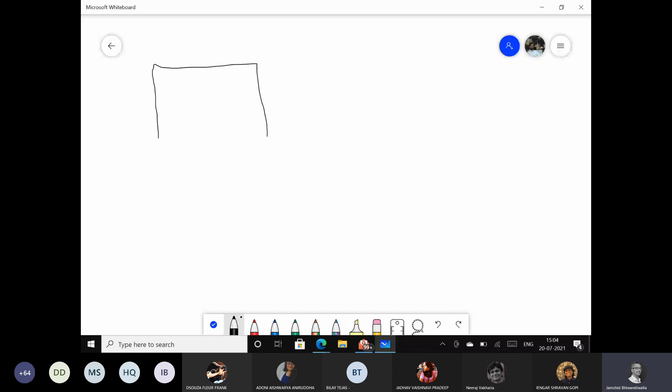The first is where usually we tend to go without understanding and create problems for ourselves: in plan I may have this building, and I may actually start planning the ramp along the outside somewhere there. So I may say that my ramp starts dipping down from here. That's my arrow. And as I go further, this is my ramp. And then at this point it becomes 0 and it comes into my basement below the building.

So my building is here, but my ramp is outside in some sense, outside the building footprint, and can be seen as a new addition. Clear? This is there. Now, there poses a big problem here.

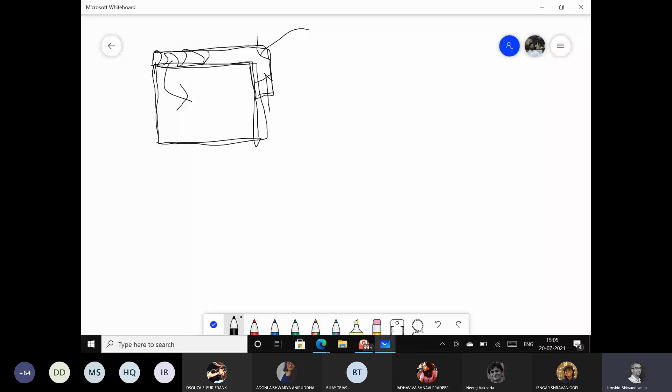The big problem here is that exposed ramps are a big threat by way of rain. That means this ramp has to be covered, because otherwise all the rain that comes down will come down into the basement. So this entire thing needs to be covered, so sometimes you have polycarbonate, all kinds of weird looking ramp covers. I do not know if you've been to malls and driven down ramps, there are various kinds of ramp conditions that are there.

Bottom line, if this is your building in section, your ramp at the side may have some kind of a polycarbonate cover like that for your car to go down, and it can look pretty odd. That is one aspect to it.

The other aspect is that your ramp becomes part of your structure. That means, if this is your building, you give an opening on the ground floor part. In your plan on the ground floor, you will have some part that is literally like a cutout. If this area is usable, this much part will not be usable. Your ramps are starting here, beyond a point dipping down and then getting into the basement there.

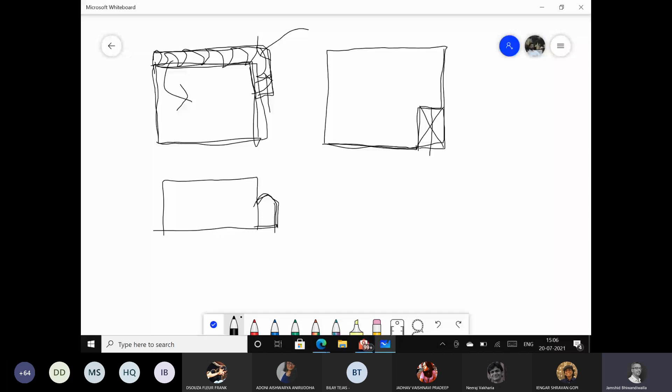In such a case, how will the elevation look? The elevation will look like that, and it will have a cutout whereby your ramp is actually entering. Not only are you seeing this cutout in the elevation of the building, you're also seeing that this cutout reflects in plan to the extent where the car dips, whatever that may be at a 1:8 or 1:10 slope. Sometimes it may be this entire area that you have a cutout.

The building from outside may look like the entire thing, but on the ground floor only so much may be usable, because your ramp is actually eating into that part for the head height before it turns and gets down into the basement, and then you have lost enough head height. Is this clear to everybody?

The two conditions: ramp outside. So you may ramp this way, another ramp may again come out like this, and a ramp may come out like that. In that case, there will be some polycarbonate or new roofing system to cover it before the car comes out. So if you keep ramps on the outside, they will need some kind of roof cover.

If your roof from here goes all the way and takes care of it, nothing like it. Or if you have a roof cover that goes like that and covers all of it, then there is no problem. But if it is like a separate building and the roof cover of your ramp is something different, then it will look pretty odd. And in that sense, this is more the preferred option.

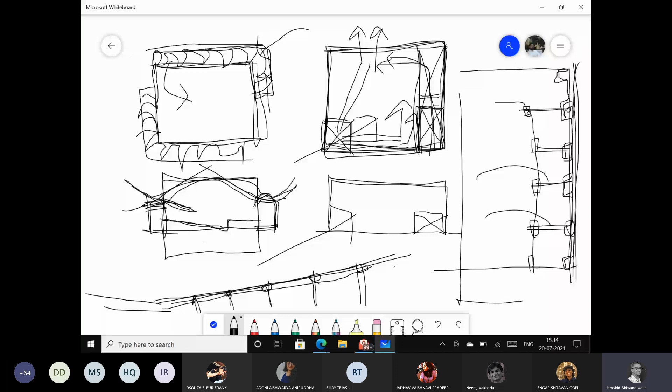The basement allows what is well known as an orchestra pit or a surprise pit. Suppose you want someone to enter from below. Then this part of the stage can actually go below right up to the basement and rise up. Like in NCPA, there is an entire big motor that allows the stage to revolve a full 360 degrees. But beyond that, the opportunities for entering the stage from the basement below are always there.

So that part of the stage should always be kept in a manner whereby there are opportunities for the stage to go up, come down, for entry into the stage, for services onto the stage, sound wires, light wires. If you want people to collapse into the stage, all those aspects can take place if you have a basement below. And naturally, basements help you for storage, furniture storage, all kinds of storage, parking.

Don't forget, if you are in an urban setup, like many people are doing their auditoriums in Bombay, then naturally you need to give at least 1/3 of the seating area. That means 50 cars as parking layout in the basement. So parking layout is something that you should know: car sizes are 2.5 by 5, and 6 meter by 6 meter grids work wonderfully well for 2 cars to sit in them. Beyond that, the structural columns that come down can help you plan car parks as much as you want. 50 cars is not a big deal for a project like this.

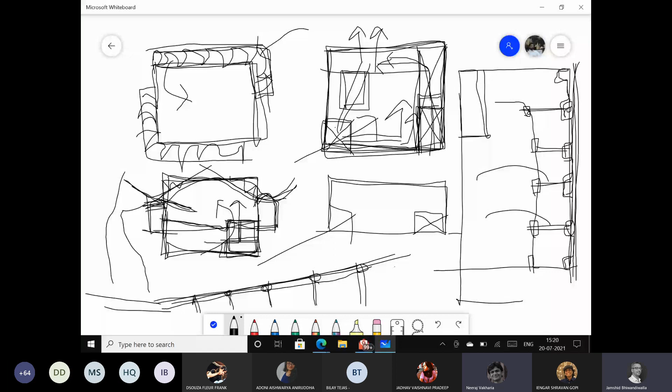Now beyond this, should anybody have any doubt, then I can go about sketching, resolving anything further. Or then I can stop presenting my screen. Any doubts for the day? Neeraj, is there anything you'd want to add? No, I guess that's what even in my group people were asking about, the basement.

There is one question in chat. What amount of headspace is required above the ramp if it is included inside? So, car heights, everybody should know car heights. I think overall basement and any ramp height should be a minimum of 2.4. 8 feet clear height.

8 feet is the minimum required for any kind of basement heights, both below as well as at the ramp level. So that's why when you want to cut out a ramp into your building, that 8 feet height kind of a cutout will be there in your building facade, because that's the kind of head height that is required. 2.4 bare minimum. Beyond that, you can have more, but having large heights in basement is not advisable.

That's why using flat slabs in basement is very advisable, because it cuts down on your beam heights, thereby cuts down on your material use by way of retaining wall and stuff like that. Any other query?